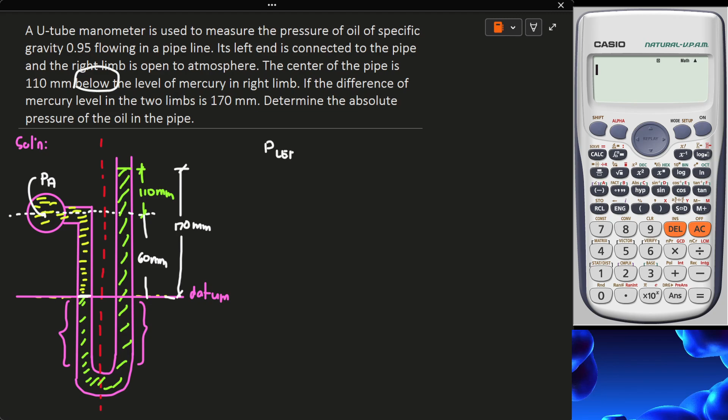So, for solving for that, to determine the pressure at A, we will use the concept natin kanina, that the pressure on the left limb must be equal to the pressure on the right limb. Now, also take note that PA is gauge pressure. So, kasi ang pinapahanap is absolute. Okay? So, therefore, ulit ang gagawin natin.

Lahat ng pressure sa PA is equivalent, or pressure sa left limb that is equal to the pressure at A plus, yan yung pressure sa A natin, di ba? Yung pressure natin dito, H, we have H there, itong height na to, at saka yung density, which is equivalent to the density 1, or yung density nito, which is yung density ng oil, times G times H. So, wala nang iba, di ba? Kasi ito lang naman ang nasa left limb natin na i-consider.

Meanwhile, sa right limb, that is equal to the density 2 times yung G times yung H2 natin. Ang H2 natin is the total height na ito. Kasi ito naman yung height nung nasa mercury natin. Yung H2 natin is equivalent siya sa total height na naandito sa right part ng limb natin. Okay? So, solving for PA, we can solve it by substituting all the values.

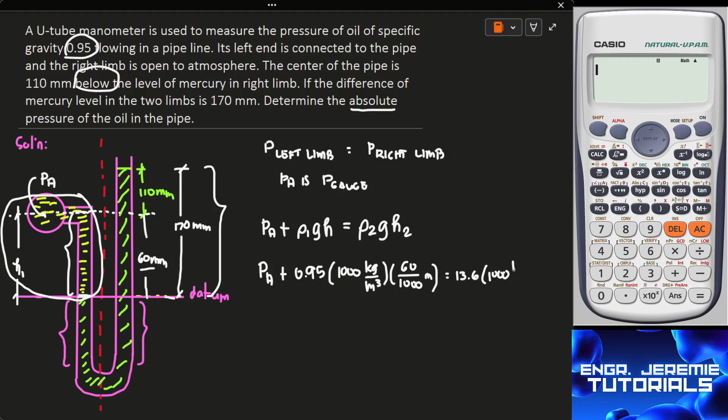So that is equal to ρ2 natin. 'Di ba? Itong yellow-green na to is a mercury. So ang density natin or specific gravity ng mercury is 13.6 times 1,000 kilogram per meter cube. And then we will multiply it by yung height, which is 170 mm. So 170, i-divide ko rin siya by 1,000 to make it meter. Okay. So yan na yung ating solution.

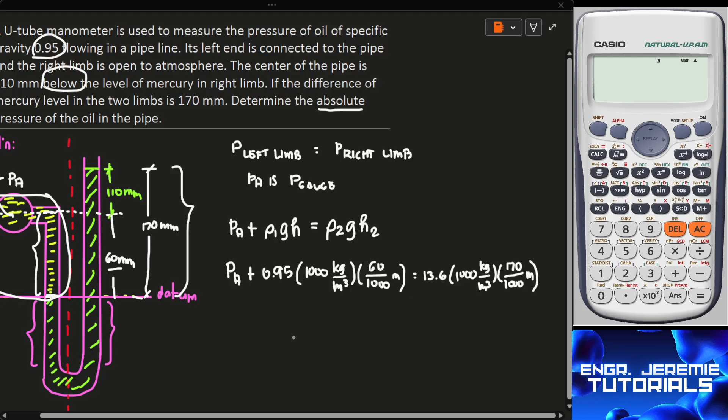So ang mangyayari, PA is now equal to, kung ililipat natin to sa kabila, or we will use our calculator, 0.95 times 1,000 times 60 over 1,000. That is equivalent to 57. Okay? So 57 Pascal ang unit niyan, 'di ba? Plus 57, this is in Pascal. Kasi ito kilogram. Nawala pala yung 9.81, yung G natin. Di natin na multiply, sorry.

So dapat meron pa dito sa gitna na 9.81 meter per second squared. And also this one, dapat meron din to na 9.81 meter per second squared. So, idagdag nyo na lang. Idagdag natin dito na kailangan pa natin mag-multiply ng 9.81 to solve for that. So, 559.17 Pascal. This is equal to, since parehas lang naman yan, palitan na lang natin to ng 13.6 at saka itong 60 palitan natin ng 170.

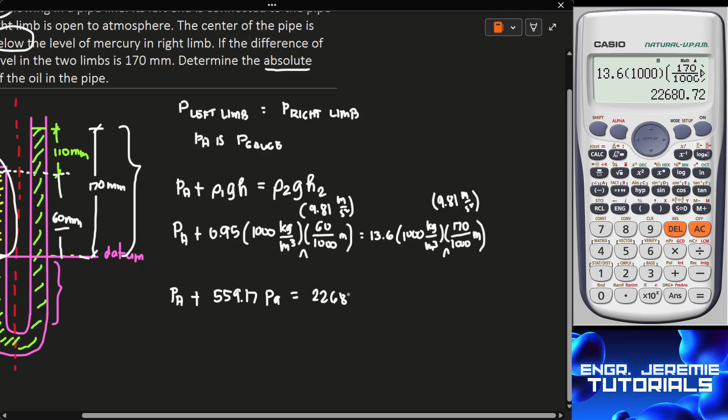So we have 22,680.72 Pascal. So i-subtract natin yan sa kabila. PA is equal to 22,680.72 minus 559.17. This is in terms of Pascal. So, PA or pressure at A dun sa loob ng pipe. Minusan daw natin to ng 559.17.

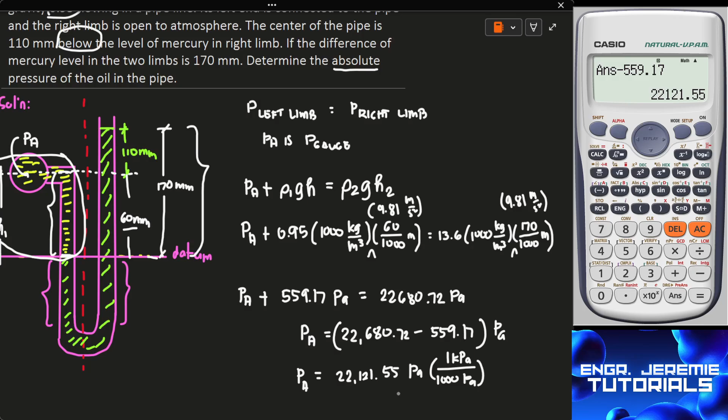We have 22,121.55 Pascal. So, convert natin, 1 kilopascal is 1,000 Pascal. So, PA is equal to, ito, i-divide naman natin siya by 1,000. So, 22.12 kPa. But take note, this is still in gauge pressure. Since ang pinapahanap sa atin is P absolute, which is equal to the P atmospheric plus P gauge natin.

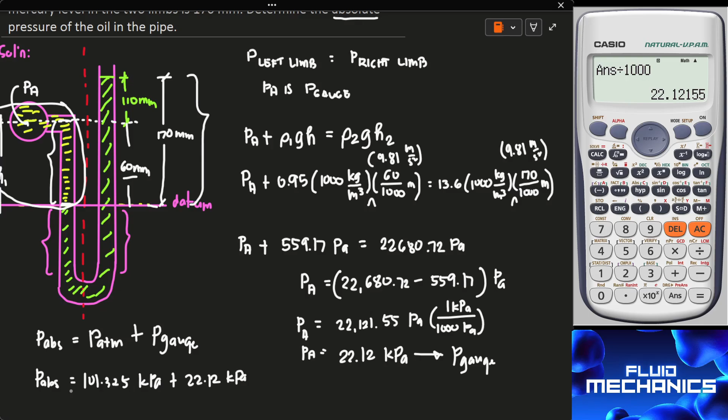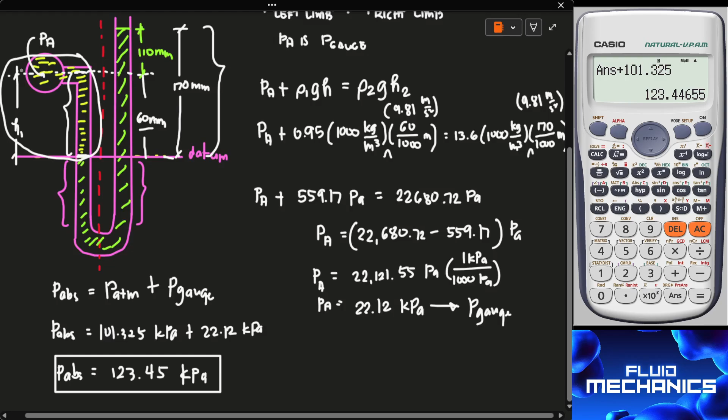So, P absolute is equal to atmospheric na 101.325 kilopascal plus 22.12 kilopascal. So, makukuha natin yung P absolute natin. So, ito, adan daw natin ng 101.325. So, 123.446 or approximately 123.45 kPa. Yan ang sagot natin for this problem. Kumbaga yan yung absolute pressure na meron na andito sa loob ng pipe na to.